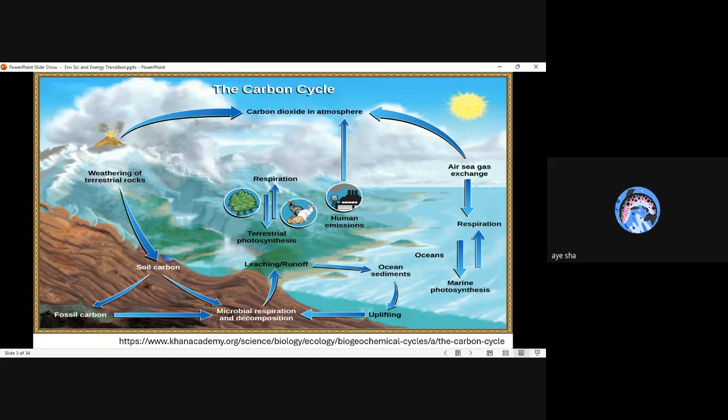Now let's dive further into this topic of carbon and its use by all of us. We see changes in climate patterns - the recent flood in Dubai is an example. When we study past trends, climate change has always been part of Earth's system. Just in the last 800,000 years, there have been 8 cycles of ice ages and warmer periods - ice age, then warmer period, then ice age, and so on.

The last ice age was about 11,000-something years ago, detected by carbon dating and other techniques. And the modern climate era began, the era of human civilization.

These changes, the alternating ice ages and warmer periods, occur due to very small variations in Earth's orbit that change the amount of solar energy our planet receives. The rotation or orbiting of the Earth changes over time, and as a result, the amount of sunlight our Earth receives changes. That was the reason these alternating ice ages and warmer periods occurred about 800,000 years ago.

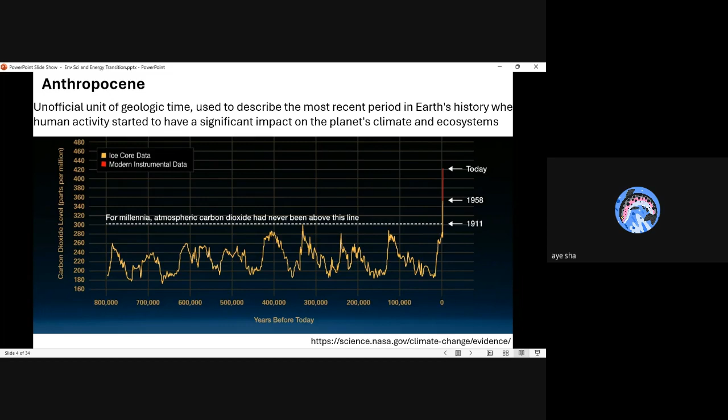About 200,000 BC, fire was used as a source of energy. Then solar power was used, then coal came, and the first windmill was introduced. Then wind power became widespread. Later, in 1690, coal again started being used, replacing wood as a source of energy.

Then geothermal power came, and the latest, fossil fuel use, started in the 1800s, when the industrial revolution began. In the late 1800s and 1900s, hydropower plants were built, and the first nuclear power plant in the USA was developed in 1951. Then in '58, the first geothermal plant was introduced in New Zealand.

In 1973, the energy crisis, the petrodollar, etc., caused people to think that they should not rely 100% or solely on fossil fuel. So they started going back to renewables again, and new technologies also developed, like photovoltaics.

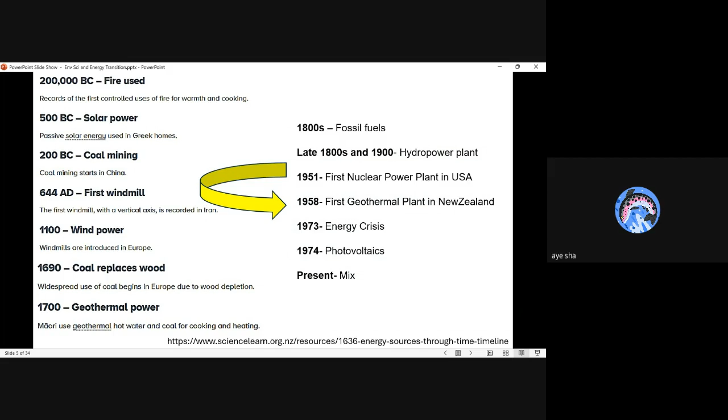Now, to take action to reduce emissions, we need to understand and measure where they are sourced from, or where they come from in the first place. Obviously, if we do not know where we are getting all this carbon dioxide in the atmosphere, we would not be able to mitigate the effects of those.

Scopes 2 and 3 deal with indirect emissions. Scope 2 includes the emissions that a company causes indirectly, coming from where the energy it purchases and uses is produced. For example, the emissions caused when generating the electricity that we use in our buildings would fall into this category. It is an indirect source of emission.

Scope 3 includes emissions that are not produced by the company itself and are not a result of activities from assets owned or controlled by them, but they are those that it's indirectly responsible for up and down its value chain. For example, when we buy, use, and dispose of a product from a supplier, it's an example of indirect emissions.

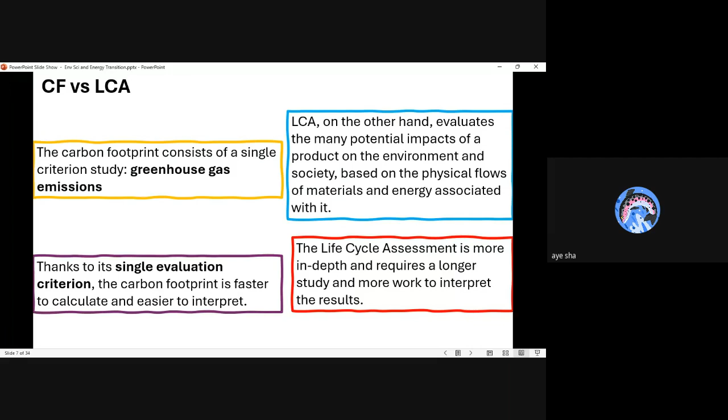Now, IPCC, you must have heard of this intergovernmental organization, United Nations panel. It's actually the United Nations body for assessing the science related to climate change. The functions of IPCC include assessment of scientific literature, since researchers all over the world are researching the impacts of climate change, or how to reduce and mitigate them.

They are assessing that scientific literature, and then communicating that literature and their own findings to the global community, and creating global collaboration, and engaging policymakers to combat climate change.

Now, they publish reports on their findings, which is actually a mass of huge data and knowledge, and how to extract valuable information from that report. I just shared an IPCC report in the WhatsApp group. You can see it later, or if you download it early, you can see it now.

Since the IPCC reports are a mass of huge data, obviously you cannot read or understand it immediately, right? You need to first open the report and get the idea of what the report is about. So it is quite a hassle to read their reports, because it is difficult, and the number of pages and amount of data is too much. So let me tell you a little bit about how to read their report and how to use the IPCC report.

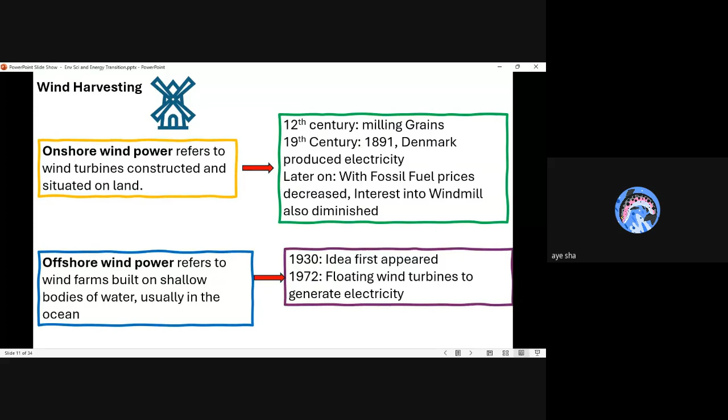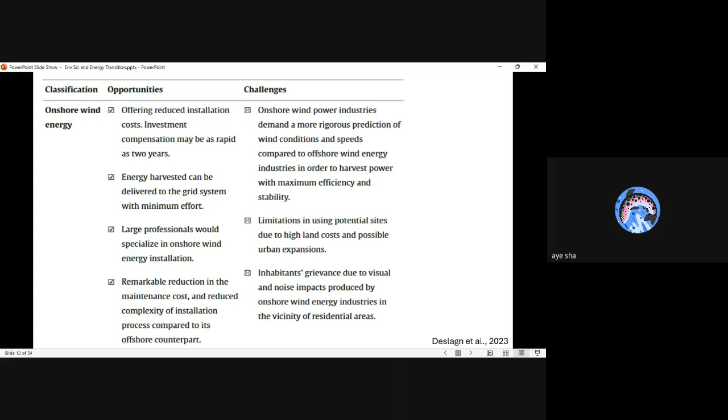I have collected some opportunities, challenges, pros and cons of onshore and offshore wind. I won't go into detail, but the gist is that onshore wind energy is a cheaper version of wind harvesting because it's present on land, so installation cost and investment are less. Onshore wind power has less efficiency, and land cost could pose a problem. Offshore wind energy, on the other hand, is costlier and has restricted access for supervision and maintenance during operations because it's away from land. But it has advantages due to robust wind speeds, since wind flows faster over water bodies.

But both of these technologies face similar problems: noise pollution and harm to biodiversity, especially birds. Next is hydroelectric power.

Hydropower or hydroelectric power is the most famous renewable source of energy. It generates power by using a dam or diversion structure to alter the natural flow of a river or water body. It uses turbines and generators to convert the kinetic energy of water into electricity, which is then fed into the electric grid to power homes, businesses, and industries.

With the passage of time, in order to harvest maximum efficiency from hydropower plants, improvements have been made. Obviously, whatever is man-made has harmful sides, like ecosystem disruption and extinction of species present in water bodies, especially many species of fish.

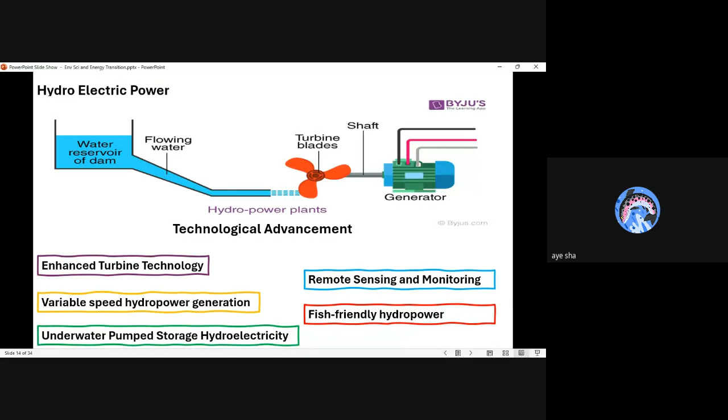Next is tidal energy, a renewable source of energy powered by the natural rise and fall of ocean tides. This too runs on turbines. They place the turbine in the tidal stream, the fast flowing water created by the tide. This fast flowing water runs the turbine, which in turn runs the generator to produce electricity. This can be done in barrages, just like in dams, and water spilling over the turbines can also turn them and power the generator to produce electricity.

Now, a main drawback with tidal energy is ecosystem disruption, obviously, because it operates in the water. Also, this technology is still infant, still new, and the power produced is not very efficient.

The power it is producing is very small, and there are some tidal power stations, for example in South Korea, China, France, England, and Canada. They also have potential to use this type of energy. The USA is not using any tidal plant, to my knowledge.

There are also, especially in the USA, legal concerns about underwater land ownership, because it's common property — seas are common property. The water bodies have no right to a particular owner. So investors try not to invest in tidal energy.

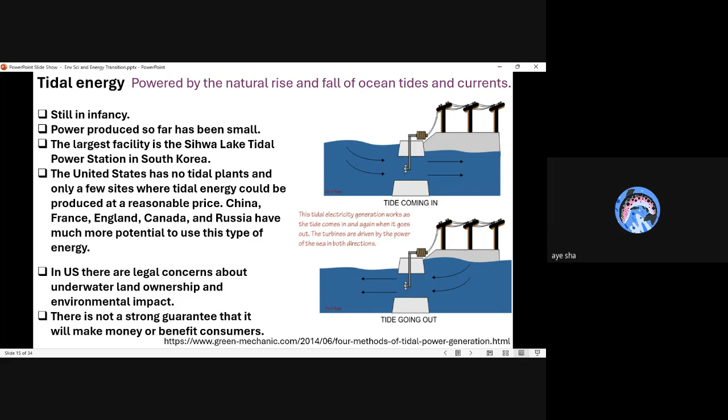Next renewable source of energy is geothermal energy, which uses steam to produce electricity. The steam actually comes from reservoirs of hot water present few miles or more below the Earth's surface. The steam rotates the turbine that activates a generator which produces electricity.

There are three types of geothermal energy plants. First is dry steam plants. They draw from underground reservoirs of steam. The steam is piped directly from underground wells to the power plant, and this steam is then directed onto a turbine or generator to produce electricity.

Then we have a binary system, or binary cycle power. They operate on water at a lower temperature, about 107 degrees Celsius. Binary cycle plants use the heat from the water, from the geyser — the natural hot water body present many miles below — to boil a working fluid.

The working fluid is any organic compound, usually a low boiling point organic compound. The working fluid is vaporized because of this heated water, and it is converted into a heat exchanger, and it is used to turn the turbine to produce electricity.

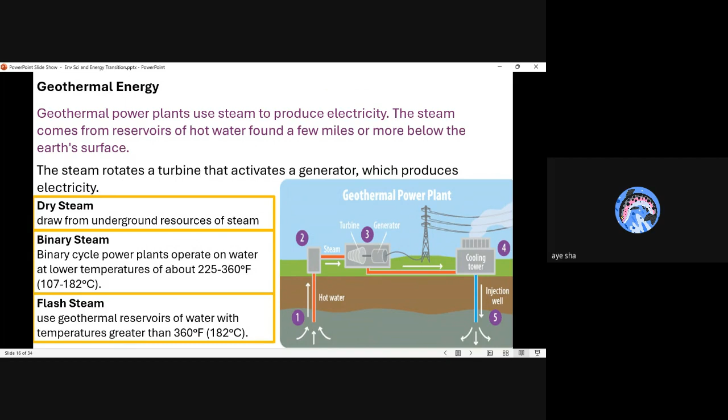This too is being worked on, and many advanced technologies are being created for this particular source of energy. For example, they have enhanced drilling processes, where they inject water to create fractures, because dry rocks are very difficult to break by natural pressure or natural processes. So they inject water into the underground reservoir to create fractures and stimulate the heat exchange.

Now, the topic of discussion is how the natural setting of a region can aid or hinder the use of renewable energy resources.

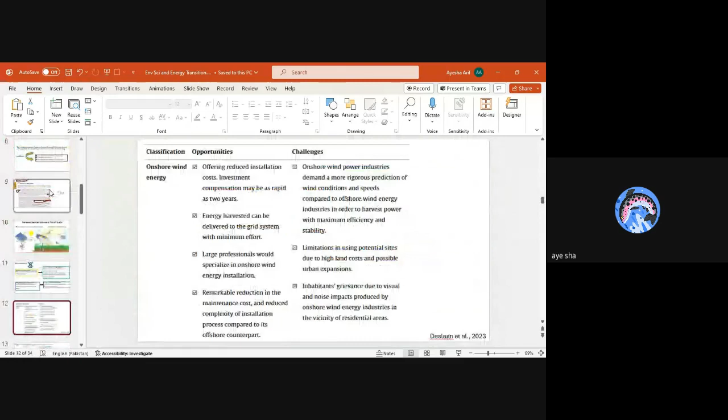Anyone among you can answer me. What do you think, that the natural setting of a region or a country or a place can aid or hinder the use of renewable energy sources? Mr. Abdul Tawab Afridi, can you explain your point of view on today's topic of discussion?

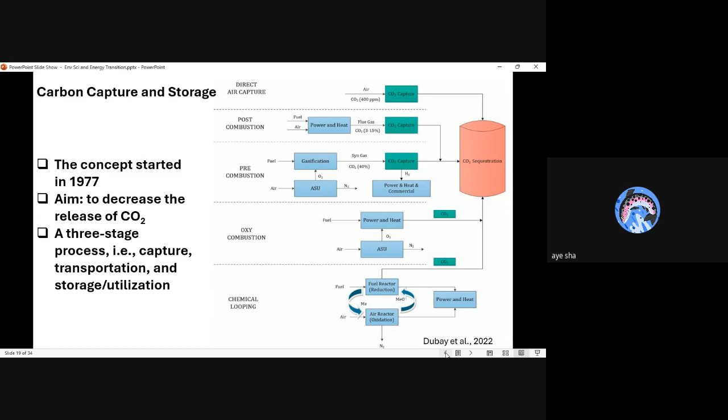We can also use biomass as a source of fuel instead of using fossil fuel. Biofuel is the energy harnessed from organic matter, typically plant material or animal waste, and converted into a usable form of fuel.

Two types of fuels can be generated from biomass, plant material, or animal waste. Biodiesel is typically formed by transesterification, a chemical conversion of triglycerides, these biomolecules, into esters, replacing the OH group with an ester group. Biodiesel is formed by this process from vegetable oil or animal fats.

Bioethanol is mainly made by fermenting sugars or starches from crops like corn, sugarcane, or wheat. They are rich in sugars, lignin, cellulose, and starches. These crops make bioethanol through the process of fermentation, which involves enzymatic reactions that metabolize larger molecules into smaller molecules and convert them into ethanol.

We are using crops, vegetables, and animal waste to create biofuels, but we are not going to use them as is. We are actually creating liquid fuel out of them, or fuel in the form of gas. So we first need to deconstruct the crop, animal waste, or plant material we are using to create biofuel. This deconstruction process can be done either with high temperature or low temperature.

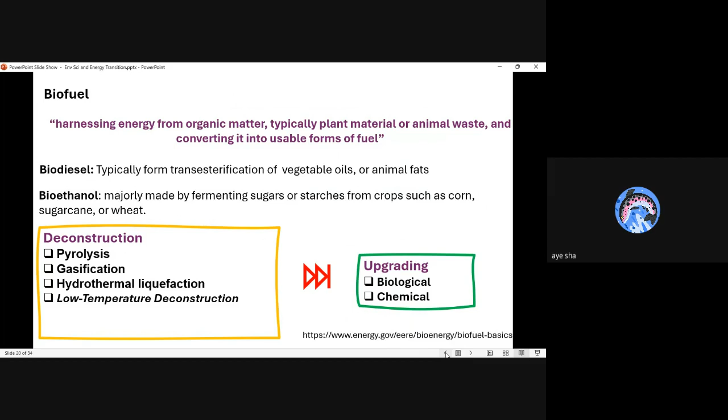Next, we have nuclear energy.

Nuclear energy is a form of energy released from the nucleus, the core of the atoms, made up of protons and neutrons.

This is the same process that occurs in the hydrogen bomb, so it is difficult to control or change the process. Now, the main process that is being used to create energy from nuclear energy is nuclear fission.

Inside the nuclear reactor, each time the reaction occurs, when the nucleus is broken down into its parts, it releases energy in a form of heat and radiation, and this heat is converted into electricity in the nuclear power plant. The nuclear power plant has a nuclear reactor, and their equipment contains and controls the chain reaction.

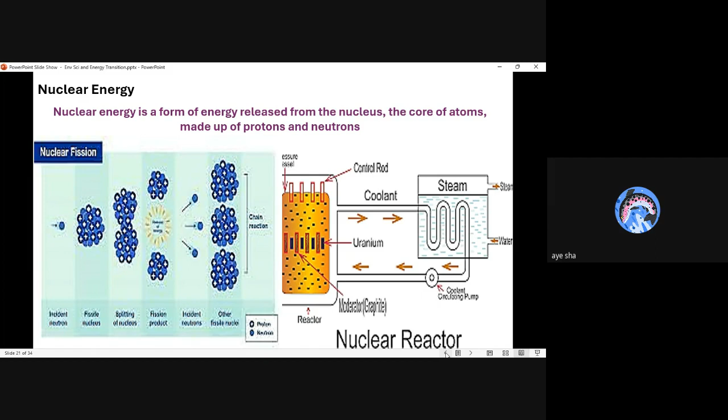For example, last year when Japan dumped its nuclear waste into the sea, there was a huge uproar by the local people and by the United Nations, because it could damage the overall ecosystem of the ocean, as well as us who will be eating those fishes and using the oceans.

Next, we have hydrogen energy. Now, hydrogen is present in abundance in our environment, like it is present in water. The formula of water is H2O, right?

It is also present in living form in the form of hydrocarbons, methane. Many hydrocarbons also have hydrogen in them, like methane, and fossil fuels also have hydrogen in it.

It has been estimated that the energy in 1 kilogram of hydrogen is equal to the energy present in 1 gallon of gasoline. So hydrogen has a very high energy density, so it can be used in a small quantity for very major applications.

Now, hydrogen can be produced in many ways. First, as I already said, it is naturally occurring, especially in areas with volcanic activities. But obviously, it is not present equally in each and every region. It is cheapest, but it is not present everywhere.

Then we have fossil fuel. We can create it from coal gasification, from GHG emission, from methane pyrolysis. But all of these ways generate greenhouse gases.

Nuclear power plants have their own safety and operational risks. Obviously, you are using a nuclear power plant and creating hydrogen from it. Hydrogen is highly explosive, so this would create a safety risk.

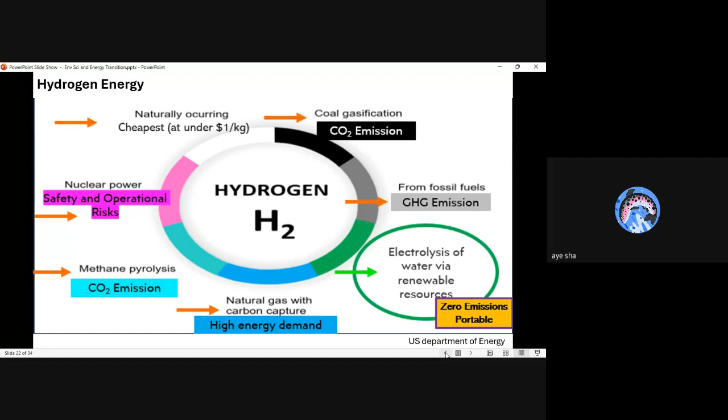Now, when the energy or electricity has been produced, the next step is distribution. Electric lines at high voltage transfer this electricity produced from renewable resources, distributing energy to the people. The electric lines carry high voltage over long distances and convert it into low voltage at the distribution station or grid station.

Now, there are two types of grid stations: one is centralized, the other is distributed. The centralized grid station is the traditional grid station. Power is generated at a large scale power plant located far from population centers, and it transmits over long distances through high voltage transmission lines to reach the consumer.

Then we have distributed grid stations as well. Here, power generation is distributed across a network of smaller scale generators, including rooftop solar panels, wind turbines, energy storage systems, and microgrids.

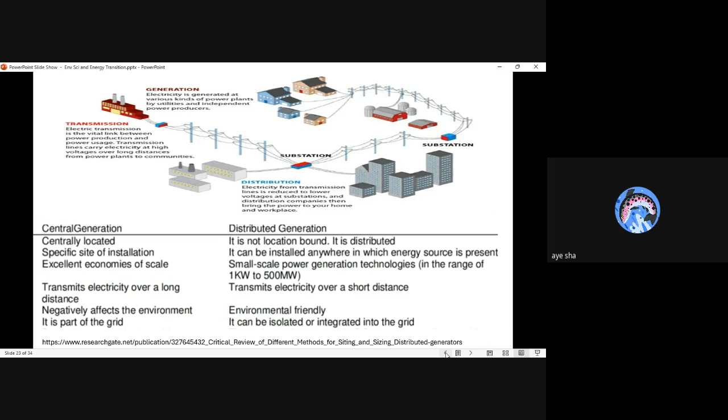Now the difference between both these grid stations, you can see on your screen, is that the centralized one is centrally located and transmits electricity over long distances, but it negatively affects the environment because it mostly uses non-renewable sources of energy, like coal power plants. The distributed generation is not location bound and can be installed anywhere a current energy source is present. It is environment friendly because it mostly consists of energy from solar plants or photovoltaics.

Okay, now we have established that renewable energy plays a key role in the journey to net zero carbon emissions, helping to reduce demand for fossil fuel by providing a cleaner source of energy. But as the world draws an increasing amount of its electricity from these renewable resources, there is a growing need for technologies that can capture and store it, because renewable energy generation mainly relies on naturally occurring factors.

For example, hydroelectric power is dependent on river flows, so the river might not be flowing well in some seasons and better in others. Similarly, solar power plants cannot work at night or in rainy or cloudy weather, and the same is true for wind power. This means these resources are intermittent; they are not continuously providing energy.

Similarly, the demand for energy is not constant either; people may require more energy in some seasons or parts of the year, and less at other times. So there is a need to store the energy produced from these renewable resources. Let's discuss some of the ways to store this renewable energy.

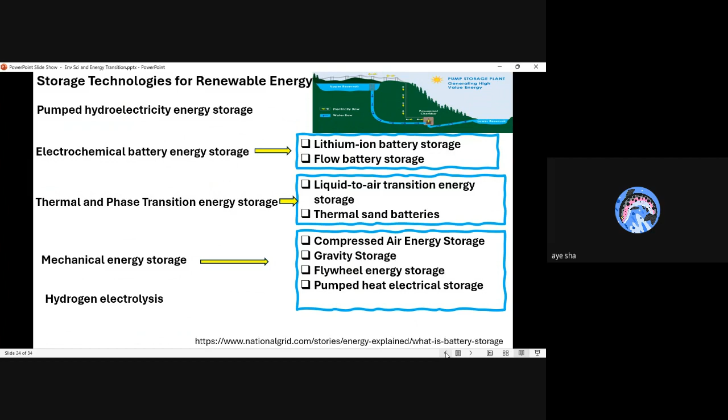Now, why do we need to store the energy that we have produced, and why is grid management essential? As I already mentioned, renewable energies are intermittent. The river would not always flow the same way in a particular season, the level might decrease or increase, and sun would not always be available. So the purpose of storing electrical energy and grid management is to store this energy.

Since renewable energy is intermittent, we would rely less on fossil fuel by storing energy. Fossil fuels are not always available, because of politics, wars, and COVID situations. In many situations, fossil fuel might not be available to each and every country or region, so reliance on fossil fuel would be decreased by using the stored electrical energy.

Similarly, storing energy during periods of low demand and using it at high demand to address energy deficiency is also a reason we need to store this energy.

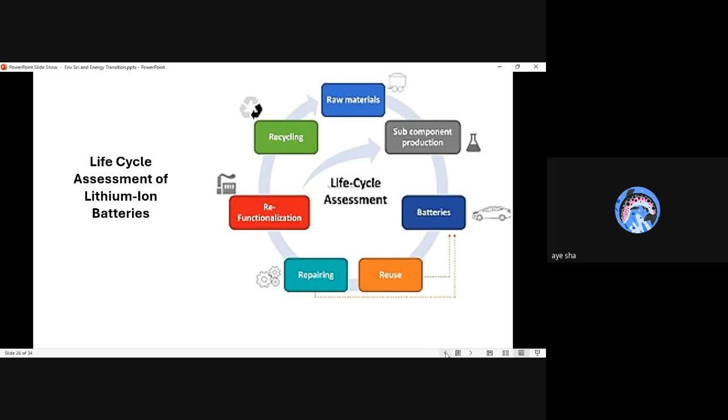Now, when we study LCA, that is life cycle assessment, we also consider the circular economy. What is circular economy? We extract the raw material, make the product, use the product, dump the product, but we also reuse and recycle the product, and the cycle continues.

According to the United States Geological Survey's Mineral Commodity Summaries of 2020, 32 countries manufacture batteries. But 50% of the output comes from just 1 or 2 countries per component. So while 32 countries are manufacturing, only 1 or 2 countries contribute 50% of the raw material.

For instance, in 2019, most of the lithium was extracted from Australia and Chile, and 70% of cobalt originated from the Congo. 53% of nickel was extracted from Indonesia, Philippines, and Russia. And more than 60% of the graphite used in lithium-ion batteries is produced by China.

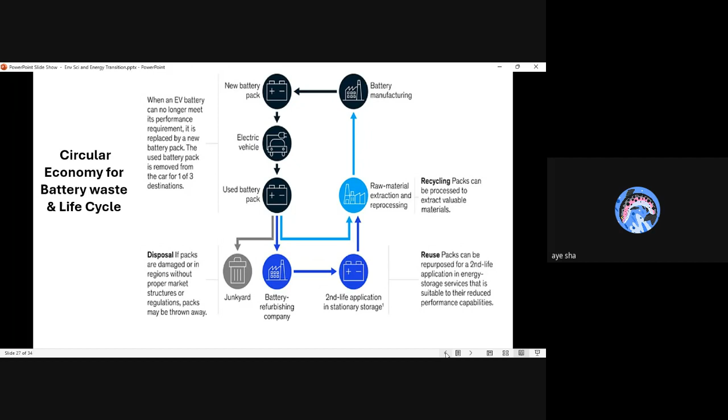Now there is another concept, the trilemma of energy transformation. It involves three aspects. As I already mentioned, the industry is facing challenges because of the pandemic and because of the war - the war in Ukraine and Russia has put energy security in the spotlight.

And because of political situations, war, or pandemic, energy security needs to be considered - we need a reliable and secure energy supply. Traditional energy like coal, oil, and natural gas - we have developed infrastructure because we have been using it since the industrial revolution, so that ensured consistent supply.

But when we transition to renewable energy resources, new infrastructure is needed that should maintain consistency in the supply of energy. Second is energy equity, that is access - a country's ability to provide universal access to affordable, fairly priced, and abundant energy for domestic and commercial use.

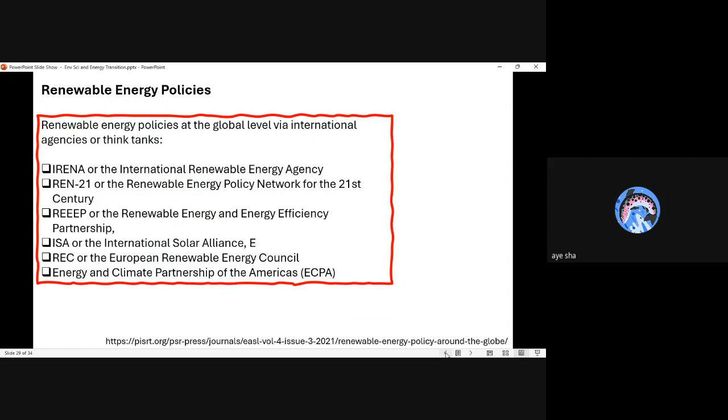There is also a concept called feed-in tariffs. It provides financial incentives for renewable energy producers by guaranteeing a fixed price for the electricity they generate over a set of time.

Also, some governments give tax incentives and credits so that private investors would diverge into renewable energy projects. There are also carbon pricing mechanisms, the carbon taxes or cap and trade system that I discussed in the last session, which put a cost on carbon emissions and give incentives to transition to low carbon emission systems. Then international agreements like the Paris Agreement and UNFCCC have established targets and commitments to reduce greenhouse gas emissions and promote renewable energy adoption on the global level.